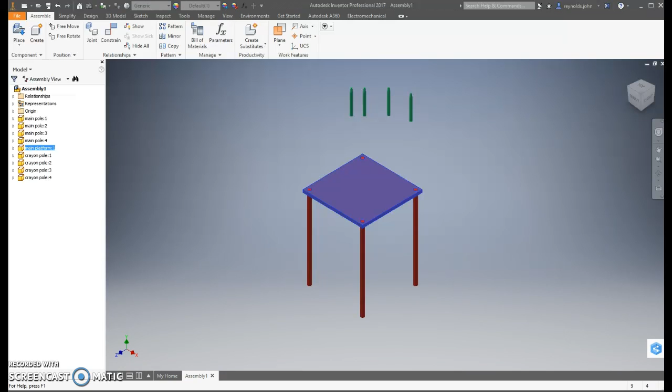Okay, today we're going to mess around with some crayon poles. This can be difficult, so we're going to follow the instructions very carefully.

The first step is I choose one of the crayon poles, and I will access the free rotate option and rotate the object so I can see the bottom. Okay, I'm going to right click and choose OK.

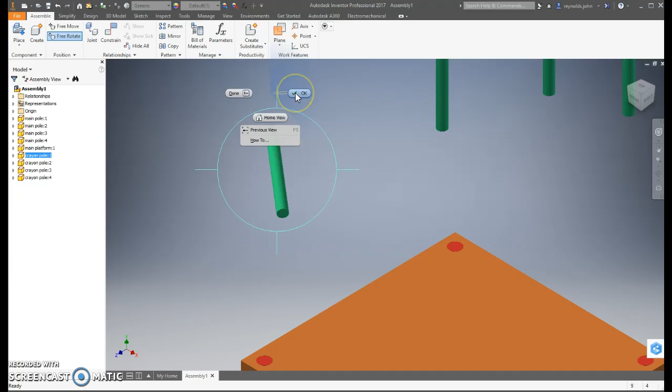Next, we're going to open the constrain area. In the constrain area, we're going to keep everything set up the way it looks. And we're going to choose very specifically now, not the green dot. The green dot represents the center point in the middle of the face. We actually want to grab the flat plane, or the flat face itself.

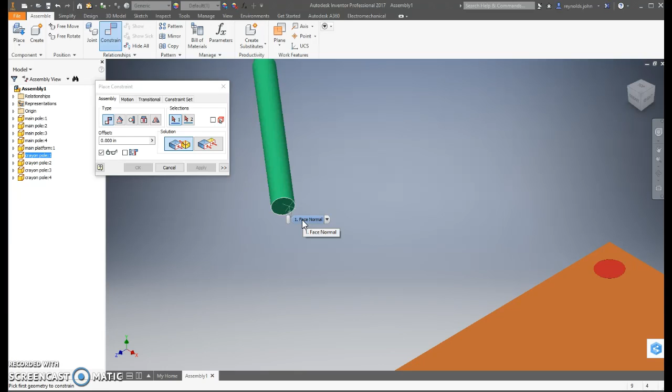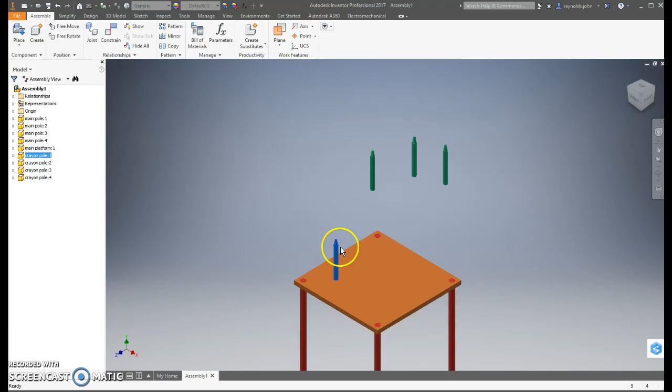Select that. Then we're going to select the flat surface of this to mate them together. Now it's kind of like if you put a cup on a table - it will not, if I apply this, act like a joystick if I move it. It tries to just slide. And you'll notice if you did it wrong, it'll act like kind of like a joystick.

Next, it's sliding around here. We need to give it a reference point. I'm going to choose constrain again. Now this time I can use the center green dot. And this one. And that's going to line the two up.

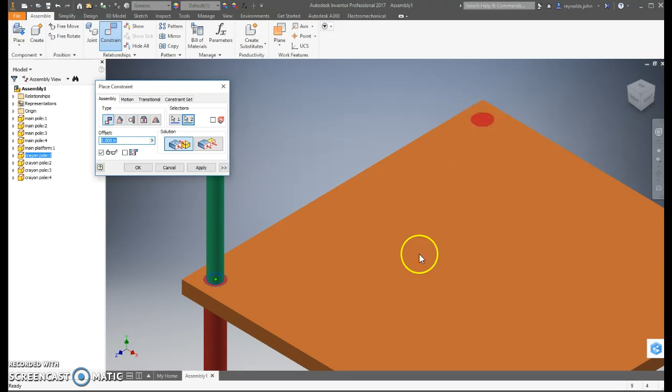Because we want them on all the corners to start. Or I would say I'd want them on all of the existing circles that are on the ends of each of these main poles. Obviously this does not look exactly like your playground setup, but this gives you the idea on how the crayons are put on. I'm going to apply that.

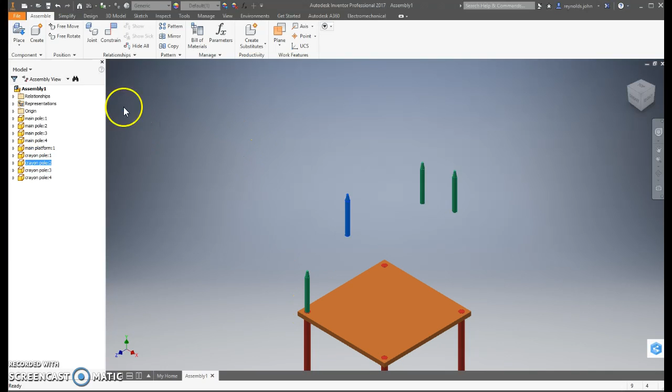Next, what about this next one? How can I place this one in relationship to this one and relationship to the edge of the platform? Same routine as far as free rotate is concerned, and selecting constrain again, very carefully the flat face and something that has to do with the face of that. Okay, apply. Next, this is a very important step.

Now you must do it in the order that I do it. We're going to tell the center green dot to be 4 inches from that line. And if you recall, when we put these in, that green dot was set 4 inches in and 4 inches over. Okay, so we do the same with this.

We'll line up our centers. So what I'm going to do is just select the green dot on this, and then type in the offset area the distance I would like it to be from the other object. Now offset basically means how far from something. Okay, so this is how far from here.

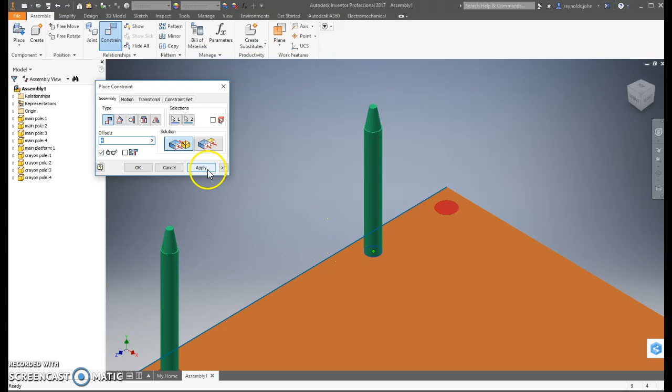Click. So what I did is I said this green dot, the space is 4, and then select that line. I do it in that order. If you don't, it can act weird. So remember, in that order.

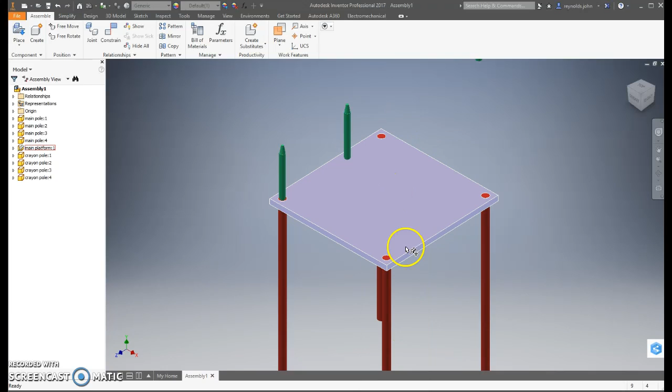Now, when I grab this, it slides around. Have you noticed that this thing is also sliding, the main platform? Annoying, right? So click on it, right click, and then ground. Oh sorry, not that - this. See, I'm trying to go too fast. Ground it. See the little push pin that shows up? I like that because now when I move this, it shows me that it still has the ability to do this, and the main platform is not floating all over the place.

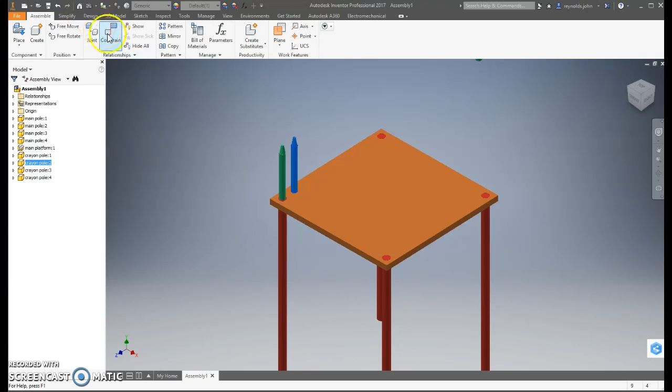So I would like this to be a distance of 7.5 from the center to the center. How do I do it? The same way I did the 4-inch offset. Select first the green dot of that one. Type in the distance that you are interested in, and then type in the destination or the measurement that you're measuring to, or the green dot. Now that has snapped 7.5 from here to here, and 4 inches from here to here.

It's also constrained flat to the top. Remember, if you select an object and you see it in the list, you can open the plus and highlight each of the rules that it has to see if it is correct. Notice it's a flat face mate with no distance. Mate 4 has a 4-inch offset, and mate 5 has a 7.5.

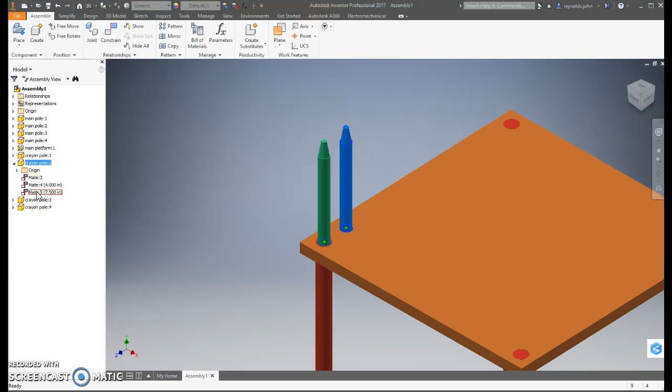If I needed to adjust it, I could right click and say edit, and then change that to something like 9, which I don't want. Remember, you can always edit from the left. Essentially when you look at your assembly packet, you'll see where your crayon pole should go, and you can follow those instructions.